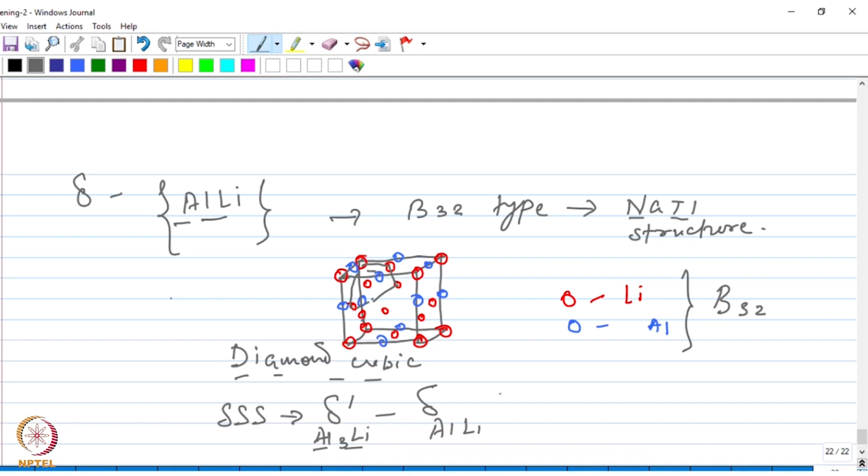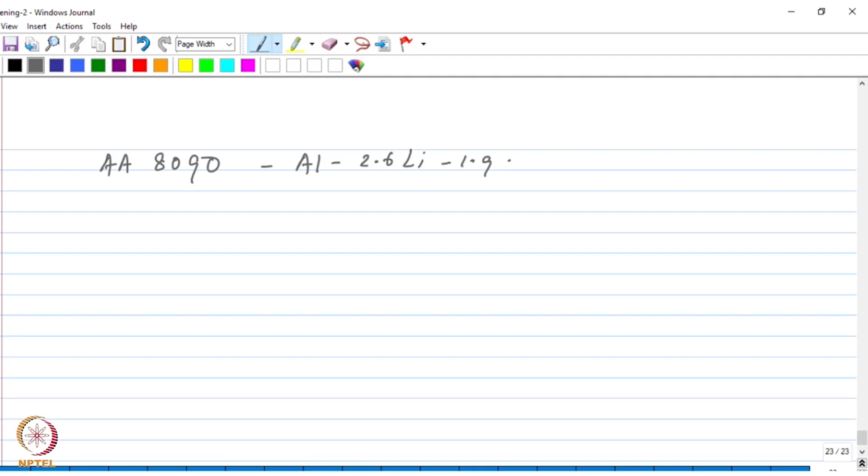What people thought could be potential areas for these alloys - now let us have a look at some of the alloys in this series. The one which really showed attractive properties is 8090, having a composition of 2.6% lithium, 1.9% copper, some amount of magnesium, and a little bit of zirconium.

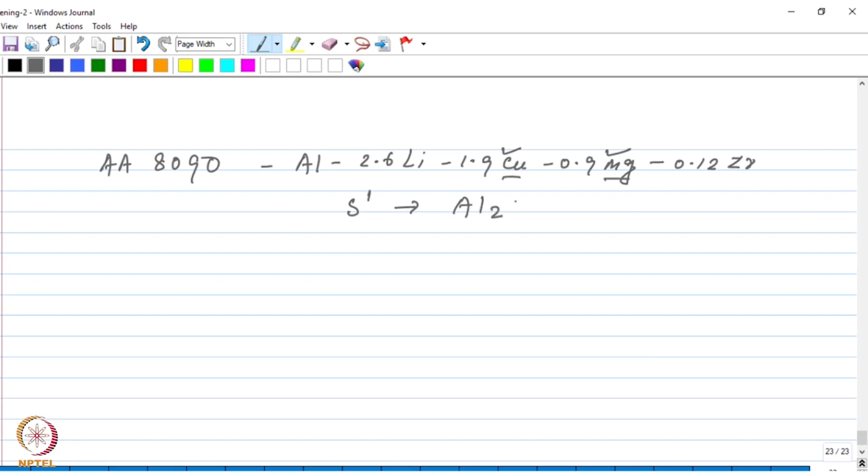So here you can see you have additionally copper and magnesium apart from lithium, right? So these two atoms can also take part in forming the precipitates, and therefore in such alloys, apart from the delta prime precipitate, you will have one more precipitate which is S prime, that contains both copper and magnesium. So you have additional contribution coming from these S prime precipitates apart from the delta prime. And another advantage is that the S prime precipitates cannot be sheared, unlike the delta prime precipitates.

So here you can expect some improved ductility, but even then, it was difficult to overcome the fracture toughness problem. The fracture toughness value, for example the K1C value, is around 40. And the yield strength is around 430 MPa. So these are actually high strength alloys. Only difficulty, as I said, is the fracture toughness and the ductility, and the density is also low, much lower than pure aluminium.

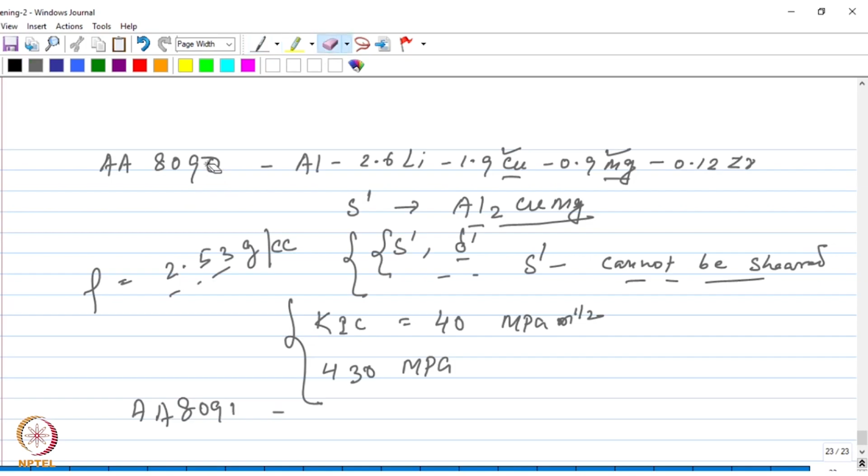One more alloy in this series is 8091. 8090 we already talked about. This one is 8090 versus 8091 in terms of composition, if you see. 8090 has a little less copper. Although the lithium remains almost the same, the copper here is around 1.3%, unlike 8091 where it was 1.9%. Magnesium also remains almost the same, as does zirconium.

And these properties that I talked about belong to 8090. For 8091, if you look at the properties, it is a little higher because you have a little more copper. So the strength is 490 MPa, but the fracture toughness is lower - from 40 it comes down to 30.

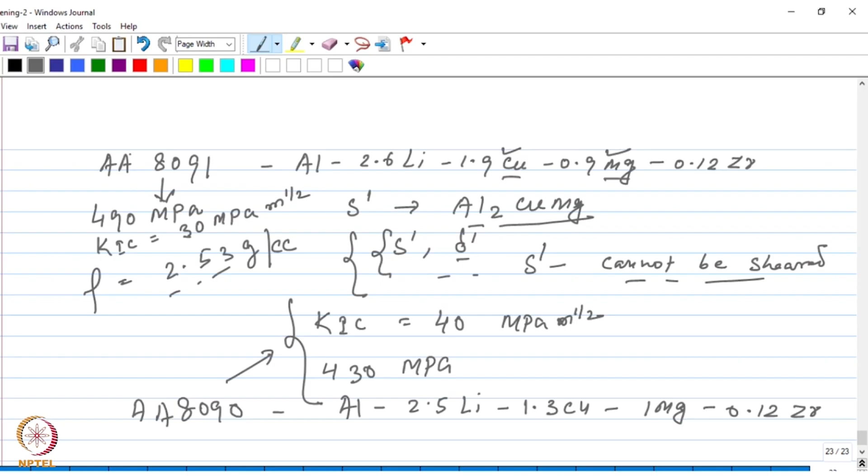All right, and this will also bring us to the end of this particular topic that we have been discussing in the last few classes, this precipitation hardening topic. But before we close this topic, it will be good to have a look at the morphology of different precipitates that we talked about.

So in the heat treatable alloys, we have the 2000 series, 6000 series, 7000 series, and 8000 series. Each of these alloys have a particular strengthening precipitate, which will also have a particular morphology. So let us have a look at the morphologies of different precipitates in these alloy systems.

So in the 2000 series aluminium copper alloys, the strengthening precipitate is CuAl2 or Al2Cu, which is also known as theta prime. And this is how the morphology of this precipitate is - this is how this particular precipitate will look like under a transmission electron microscope.

Now in the 2000 series alloys, sometimes you also have some amount of magnesium. So if you have magnesium, apart from the theta prime precipitate, one more precipitate forms, known as the S prime precipitate, or Al2CuMg. We have seen the morphology of the theta prime precipitate on the left hand side image, and on the right hand side, apart from theta prime, you would also see other precipitates appearing as needles, shown by these arrows. You can see this needle kind of morphology around this area, for example - these are the S prime or Al2CuMg precipitates. So these are the precipitate morphologies in the 2000 series alloy.

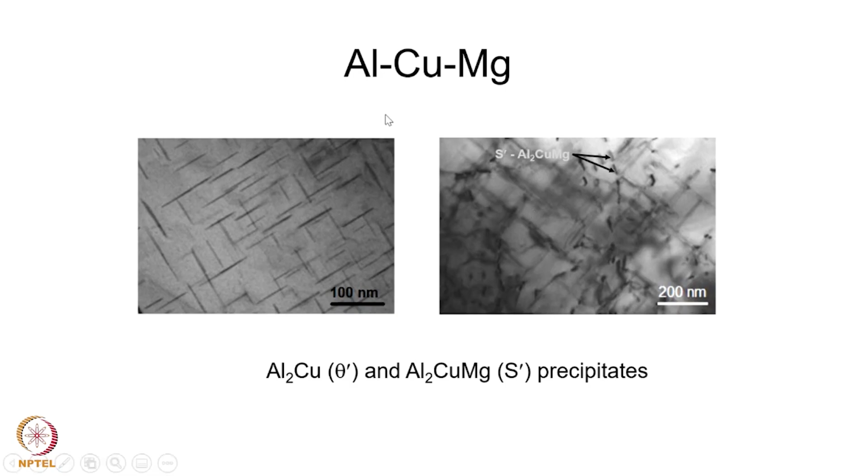Now let us go to the next one, that is aluminium magnesium silicon 6000 series alloys. And if you recall, in these alloys the strengthening precipitate is Mg2Si. This is the morphology of these precipitates - this is how it will appear when looked under a transmission electron microscope.

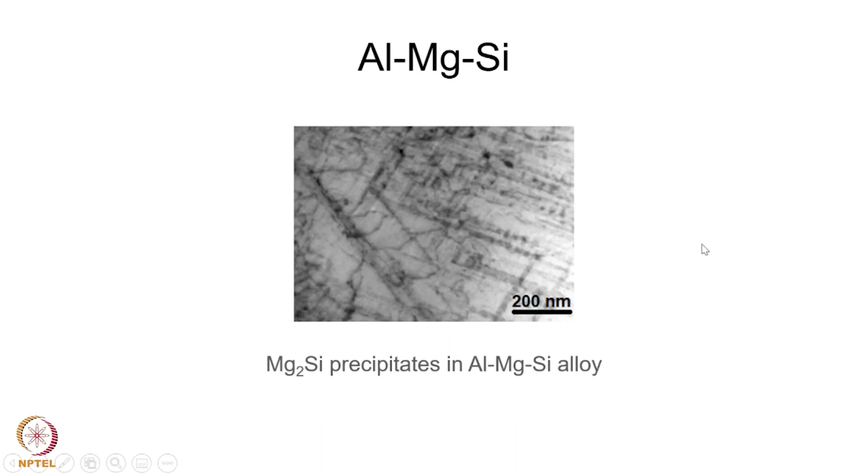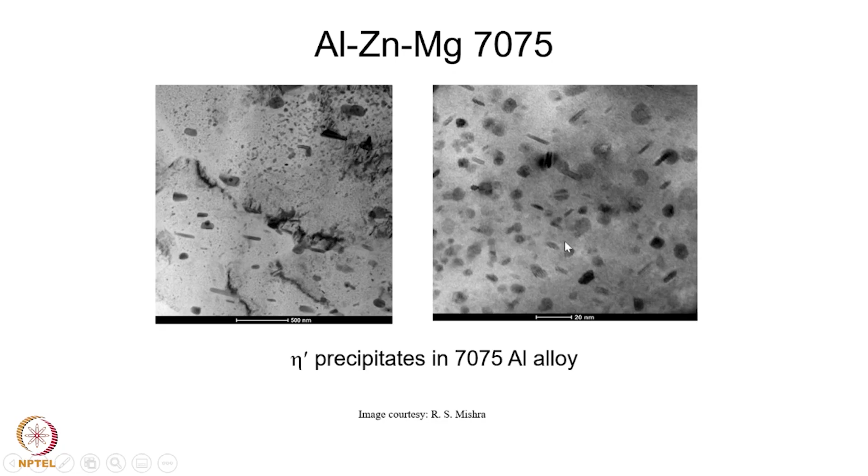Now let us go to the next one, that is 7000 series alloys. So here we have the 7075 alloy, where the precipitate is eta prime, and this is how they look like. These two TEM images show the morphology of the eta prime precipitates. The precipitate volume fraction could be different depending on the aging conditions or the actual composition of the alloy, but the morphology is going to remain the same, as you could see from here.

So these are the different kinds of precipitates that you have in these heat treatable alloys, and this is how they appear in morphology when looked under a transmission electron microscope. With this we can close this particular topic. We can conclude this topic.

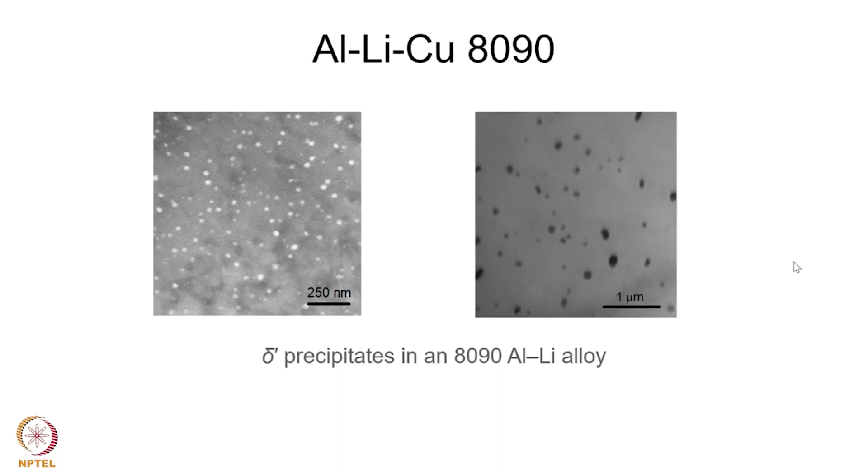But still we are not done with the strengthening mechanisms, because there are few more strengthening mechanisms that we have for aluminium alloys. Especially for the non-heat treatable alloys, you do not have a mechanism like what we discussed just now, the precipitation hardening, because there you cannot form precipitates. So for those kind of alloys, what could be the other mechanisms? We must have some other strengthening mechanisms also that we can make use of for the other alloys which are not heat treatable, and that is what we are going to look at right now, and maybe the next couple of classes.

So we have talked about, if you remember, giving some amount of deformation even for the precipitation hardenable alloys in between or after the precipitation. That was done to further increase the strength, or to make sure that the precipitates form uniformly, and the dislocations generated due to the cold working can act as the heterogeneous nucleation sites. So cold working is one mechanism through which you can actually increase the strength also. That also becomes one of the strengthening mechanisms.

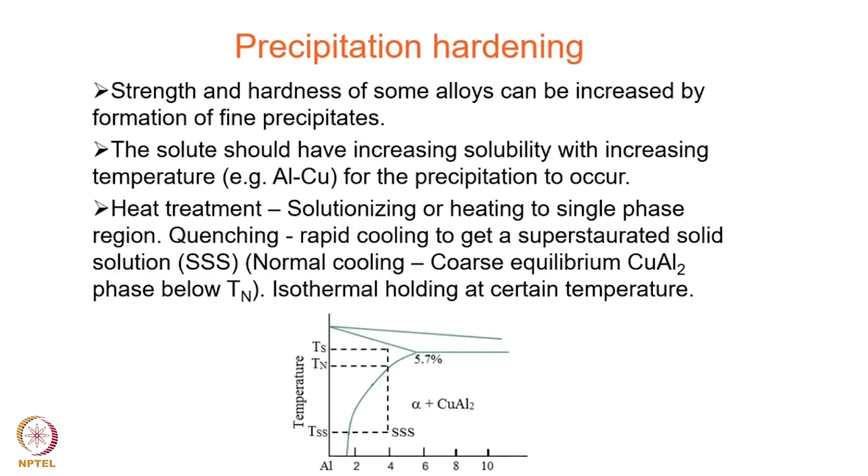These two are synonymous. This refers to deforming the material in cold condition. Cold means a temperature which may be room temperature or some other temperature at which the recovery mechanisms cannot come into play. Recovery mechanisms means the recovery and the recrystallization which can occur for the dislocation annihilation process to start. So cold working is the process through which you deform the material and generate additional dislocations to increase the dislocation density, and through that you obtain the strengthening. It has to be done at a temperature where you can retain these dislocations generated by the deformation process. So when you do that cold working at such temperatures, which may be room temperature also, it will be referred to as cold working.

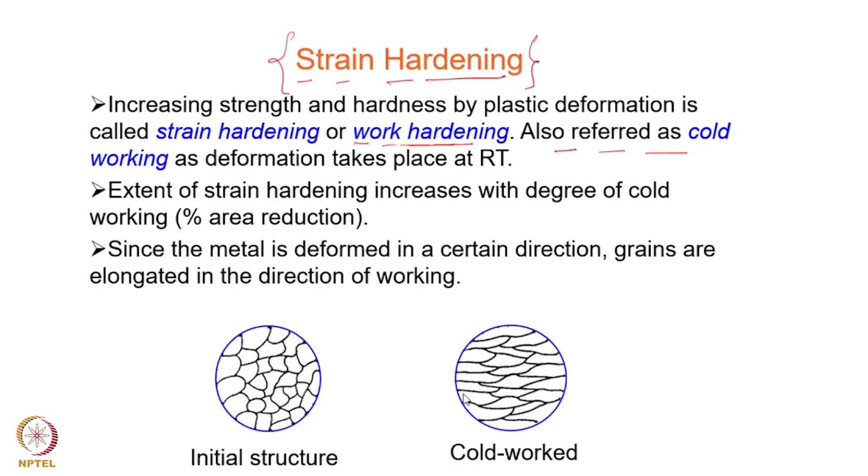Because of the availability of higher dislocation density, the motion of other dislocations moving on the slip plane as you deform the material will be difficult, and as a result the strength will increase. So this is about dislocation interaction, which hampers the motion of dislocations, and that increase in strength can be given by an equation relating strength to dislocation density.

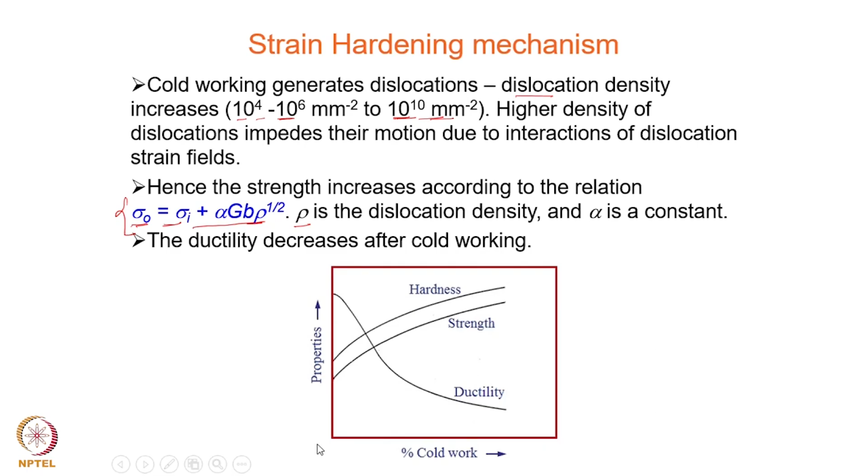So this is with regard to strain hardening of aluminum alloys, and we are going to look at the corresponding alloy designations or tempers.

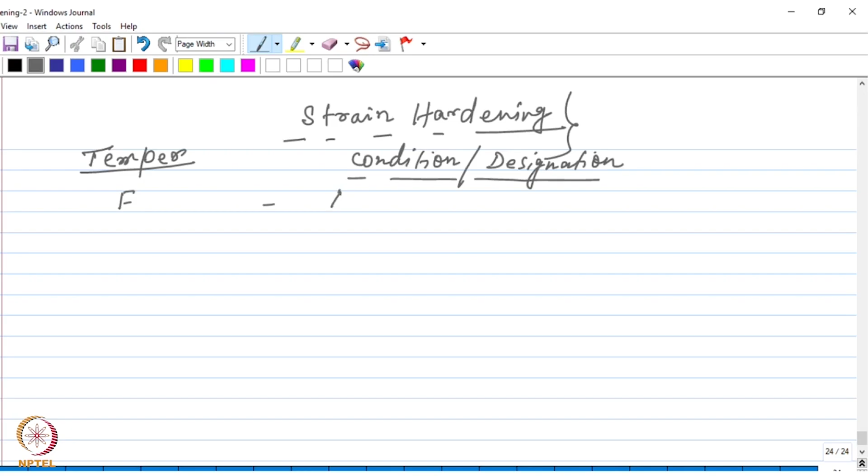These two we have already seen before, F and O. F indicates as fabricated, and O means annealed, or recrystallized.

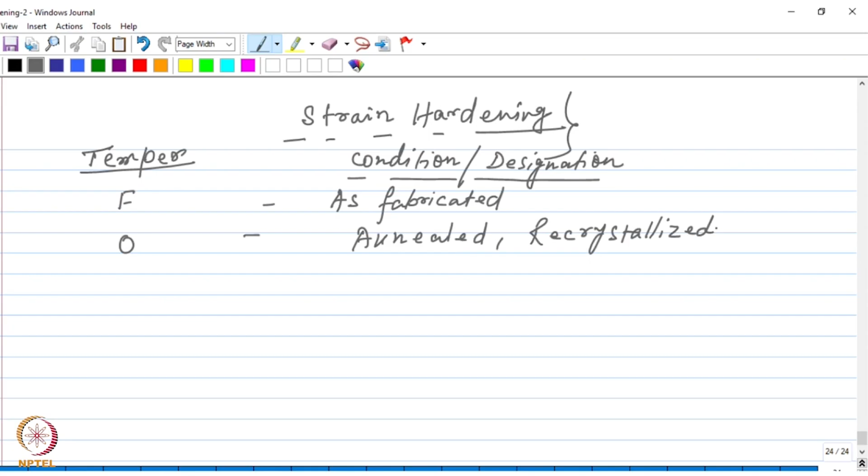Now, when you talk about hardening, this letter H comes into picture, indicating strain hardening, and this will be followed by a digit like 1, for example. So when you see H in the temper, then you know that this alloy has been strain hardened. To what level or degree it has been deformed or strain hardened can be identified from one more digit which follows the first digit.

So it will be like this: H12, H14, H16 and H18.

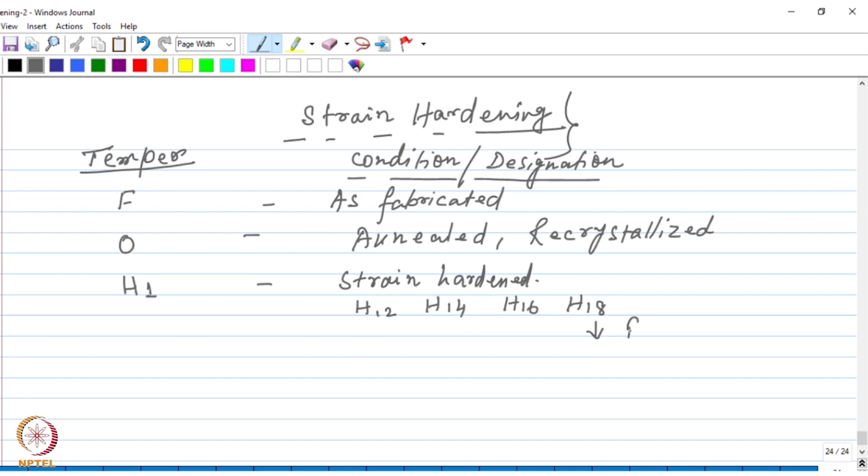So H18 means fully hardened condition, the 8 indicates fully hardened. And therefore the others accordingly indicate the level of strain hardening. If 8 is 100%, then 2 will be 25%, so H12 is 1/4 hardened. Similarly H14 is half hardened or 1/2, and H16 is 3/4 hardened.

So with the help of the second digit, you can identify the level or degree of deformation given to the material. And if you find beyond 8, that means if you have a temper like H19, that means this is extra hardened.

Fully hardened is something where you have a 75% reduction in the cross-sectional area by the deformation process applied. So H19 would indicate that the deformation is beyond 75% reduction in the area.

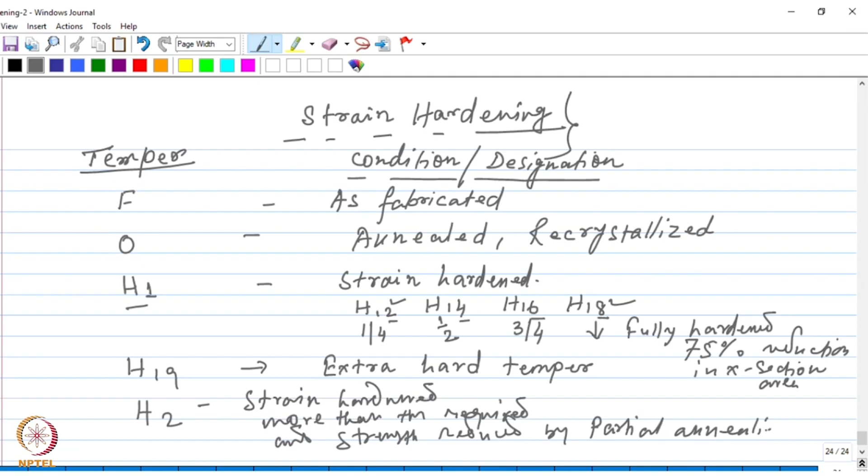And then you have the H2 temper, like how you have H1. H2 basically indicates strain hardened given first more than required, and afterwards it is reduced. So first it is extra hardened, and then the strength is reduced to the required level by partial annealing. That is what H2 indicates.

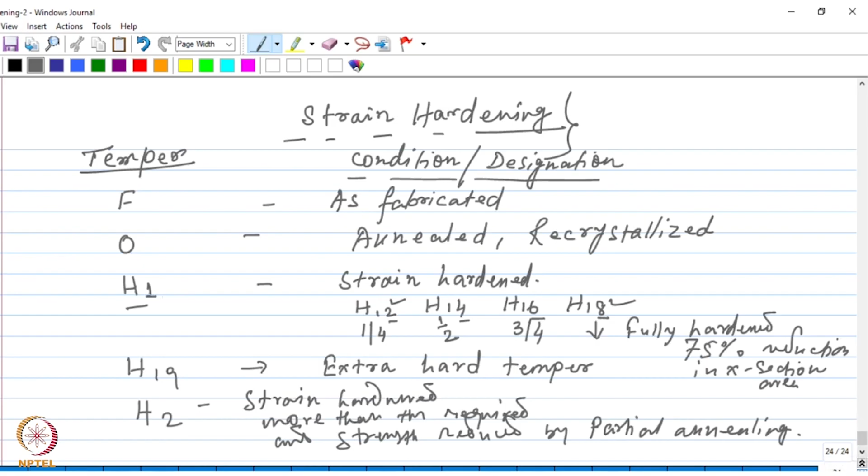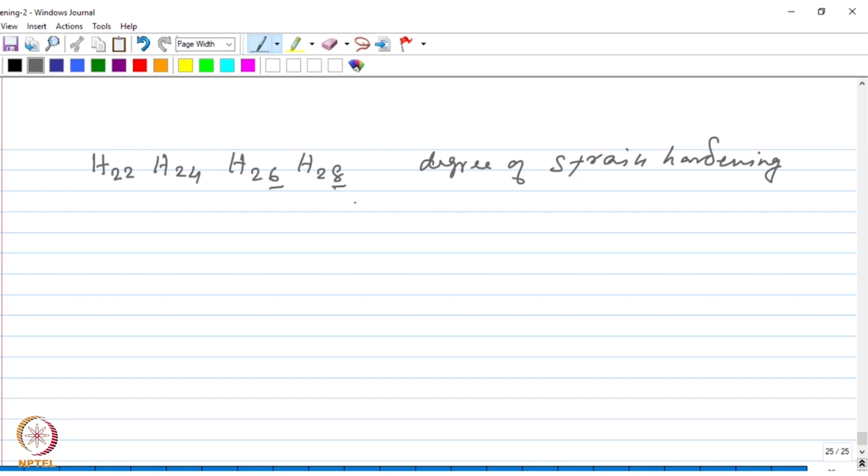And like in case of H1, you have one more digit to follow, here also you have the same thing. So in the previous case, the second digit indicates the level of straining or degree of deformation, but in this case, the second digit indicates the degree of strain hardening which is remaining, because as I said, it is partially annealed to reduce it. So after annealing, whatever is the remaining level of strain hardening is indicated by this second digit.

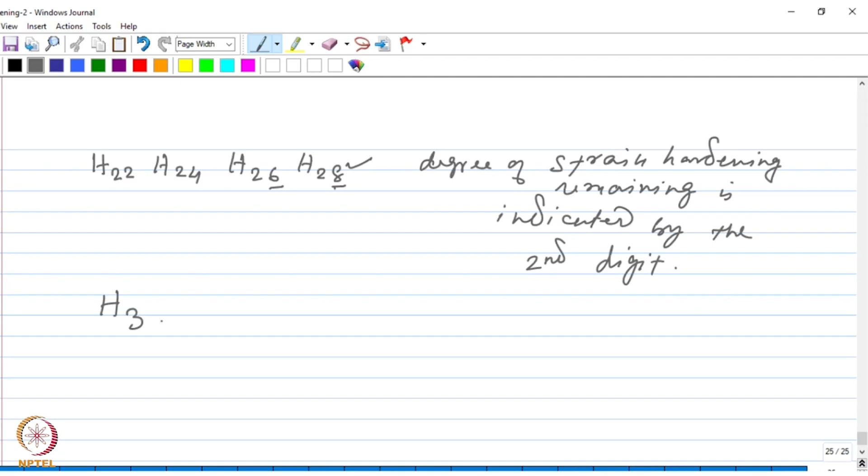And finally, you also have H3. Here it is strain hardened first, and then stabilized or annealed. And you have similar second digits here also, and in this case the second digit indicates the strain hardening remaining after the stabilization operation.

Stabilization is nothing but heating the material at a particular temperature, typically around 110 to 180 degrees Celsius, to anneal it, so that you can reduce the degree of straining which was given in the beginning, to bring it to the level which is actually needed. So the second digit here indicates, after the stabilization operation, whatever strain hardening is remaining.